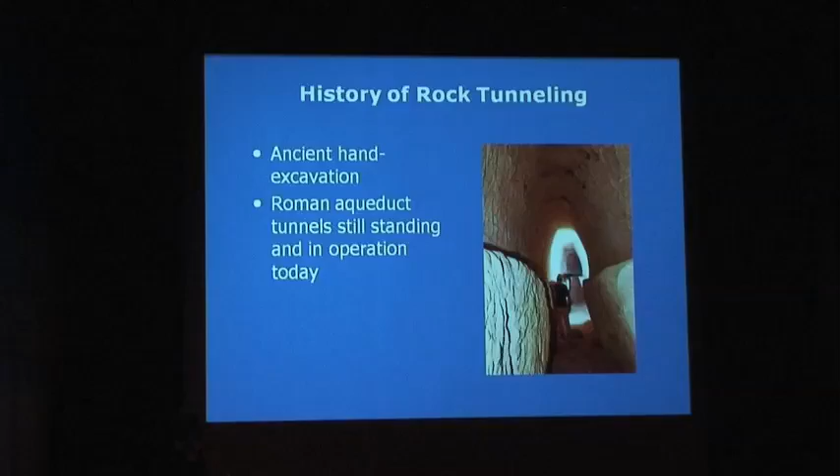So, we'll begin right at the beginning, and that is the use of the underground space for tunneling to provide water and other facilities to the ancient civilizations, the Romans, the Egyptians. And you can see from the shape of the tunnel here, which was built in those days, they relied upon the inherent strength of the rock itself, the shape of it to maintain its integrity. There's no support inside, it's hand excavated, and it still stands today, many of them still in operation.

The beauty of the tunnel boring machine is that tunnels are now excavated, built, and last for centuries in ground that would not allow such excavation, but for the fact that we have the facilities and the capabilities of modern tunneling techniques.

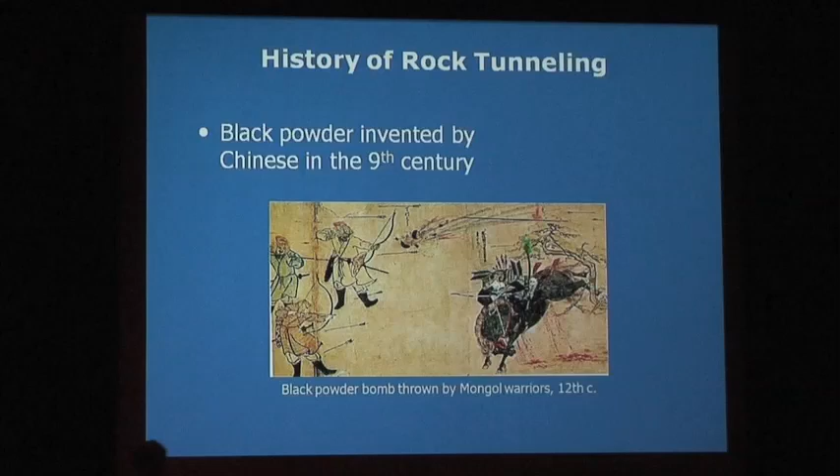The first attempt at excavating tunnels that were not hand dug was by the use of black powder, an invention that comes to us from the Chinese in the 9th century. Here you can see that the black powder was first invented for uses other than peaceful civil engineering. Black powder was then used in the early tunnel excavations.

The Hoosac Tunnel in the United States is one of the first long major tunnels that was built for a railway to go through the Hoosac Mountain, between 1852 and 1873. It took an awful long time to excavate the tunnel, not all necessarily because of the difficult geology that was experienced at the West Tunnel, but other things interfered, including lack of funds, which hasn't changed to this day either. Many tunnels are still interrupted, delayed due to lack of funding.

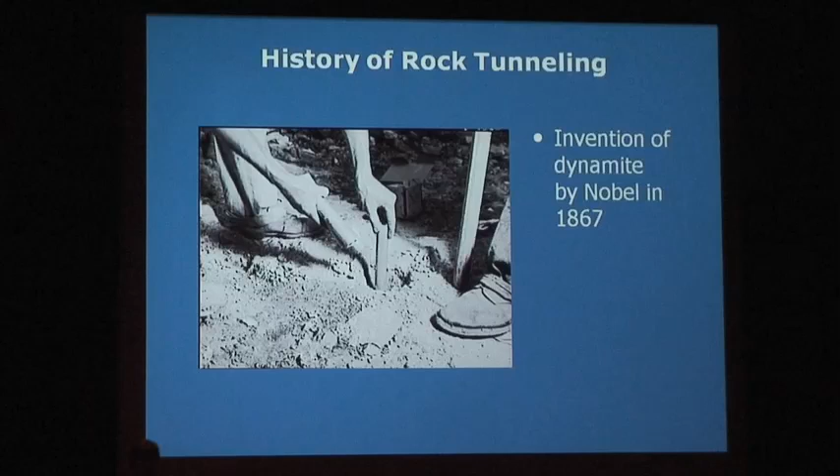The black powder was inserted into holes in the rock face that were drilled with initially handheld drill rods, with the second team member whacking the end of the rod with a sledgehammer and the partner holding the drill steel and turning it for every impact. Pretty dangerous situation. The invention of dynamite increased the safety to a degree. It is still a very hazardous method of tunneling. And so one of the motivations for the invention of the mechanized tunneling systems was to increase safety and eliminate the hazards involved. Drill and blast then became one of the principal methods of excavating the early tunnels through hard rock.

When it came to soft ground, there was no way really of separating the excavation from the support and the lining, which introduced the invention of Marc Brunel, who invented the tunneling shield. As you can see here, the shield was comprised of 12 sections in 3 levels, 12 across and 3 deep, with a man in every cell. So that's 36 men working at the face simultaneously. The boards here are supporting the soft ground ahead of them with these screw jacks. Take the screw jacks away, excavate a few inches, put the board back, and so work down this guy, this guy, this guy, and 12 across. Behind them, the teams were building the layers of bricks and pushing the shield with the screw jack forward for every advance. Very slow, very laborious, very labor intensive, quite dangerous.

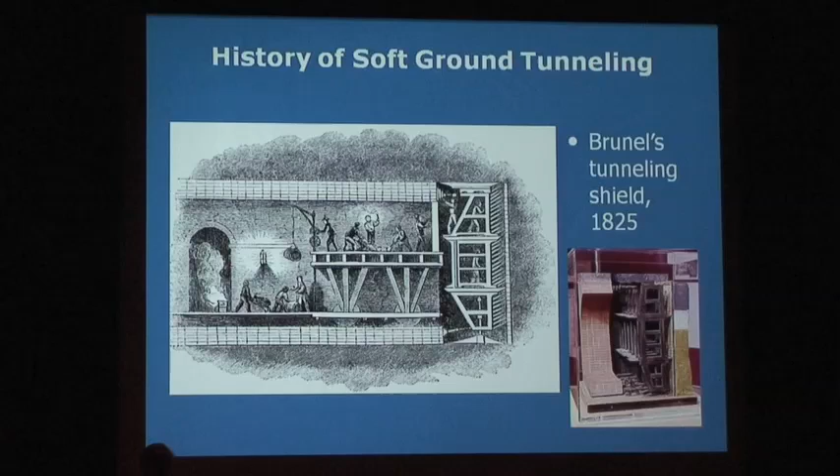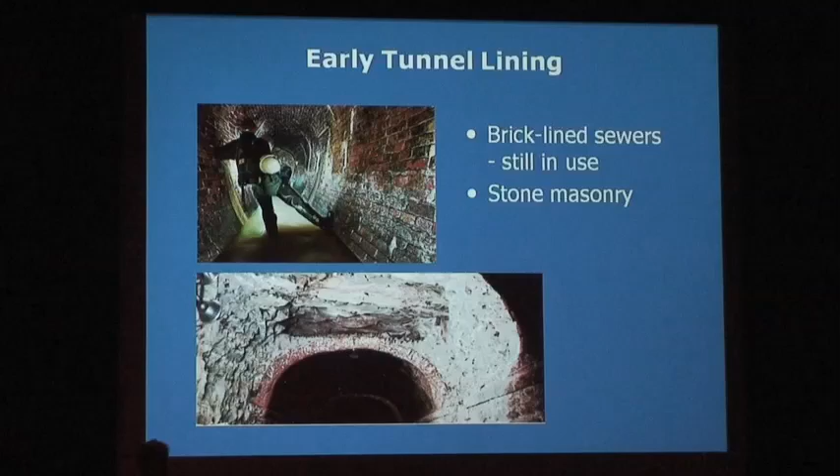Brunel's tunnel was a square or a rectangular shape. And the next major development was the introduction of the Greathead circular shields. Again, with hand excavation of the face, but here with cast iron segments now instead of bricks or masonry for the support. And into the 1950s, the use of precast concrete segments to support the opening. Still again with hand excavation and wood timbers to support a soft face.

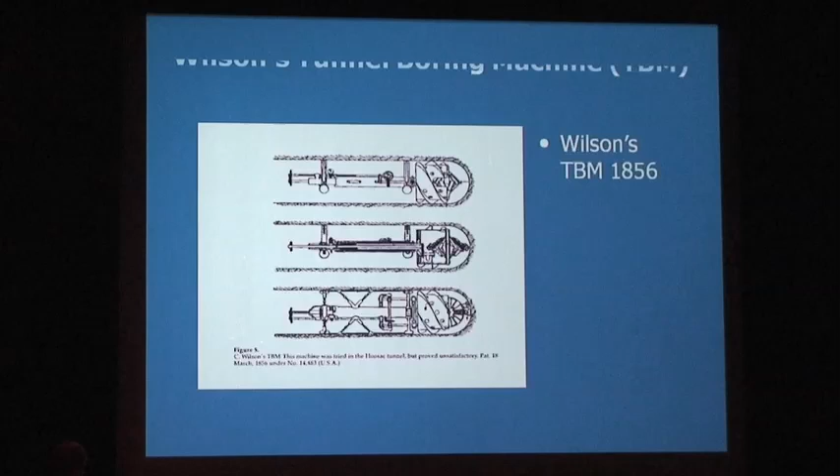We go then onto the early mechanical inventions. And some of these, you'll be surprised, were used very early on. This particular machine here was actually the beginning of the Hoosac Tunnel in the middle 1800s. The machine was cutting a 24-foot diameter tunnel face. The Hoosac Tunnel is about 25,000 feet long, about 4.5 miles, and it was expected that this machine would advance at about 12 feet a day. With a machine at both ends, it was anticipated that the entire tunnel would be excavated in just over 1,000 days. Unfortunately, that didn't quite happen like that. And it took more than 25 years, in fact, to finish the excavation of the tunnel.

This machine was built in Boston. It was taken to the east portal of the tunnel, and was launched in a test pilot site. It excavated 12 feet and seized up in a boring round and stayed there for many, many years before it was retrieved. The hole it dug was used subsequently during the advance of the tunnel as a workshop.

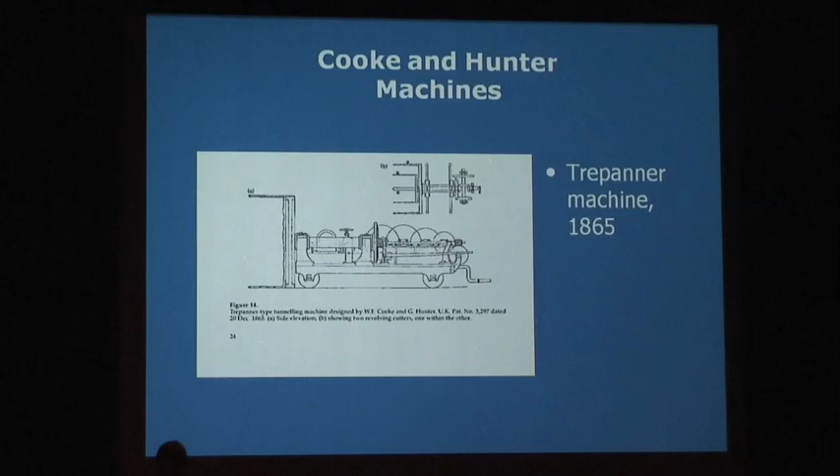Another idea from Cooke and Hunter was a rotating drum type machine, whereby the face is cut as the drum rotates this way, and the two side panels. So you can see you're building quite an odd-shaped tunnel, but the full face is being excavated as the machine moves forward.

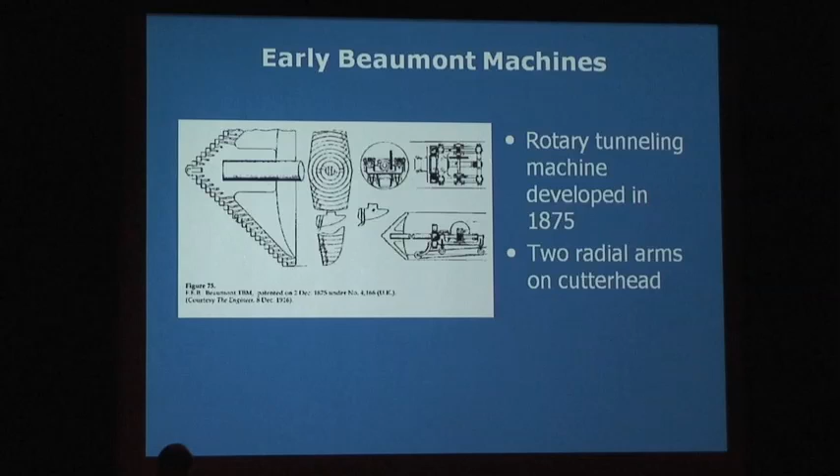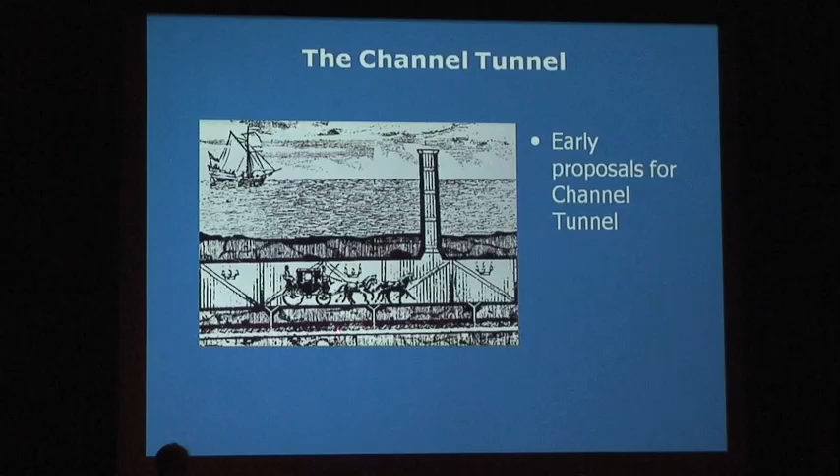Many of these very early tunneling machine ideas were invented to satisfy the fascination of many tunneling engineers with the prospect of a fixed link between England and France underneath the channel. So some of the very early ideas, as you can see, are pretty fanciful, but nevertheless, they were realistic. You needed to have the shafts to ventilate the 50-kilometer plus link, and underneath a drainage tunnel, just in case there might be a bit of water seeping through.

Beaumont's tunnel. This is also quite controversial. The industry does have its controversies every now and then, and this was controversial in the fact that Colonel Beaumont takes the credit for having excavated about 2 kilometers of an attempt at the Channel Tunnel in the 1880s. But a captain, Tom English, actually lays claim to that effort. This particular tunneling machine was powered by compressed air.

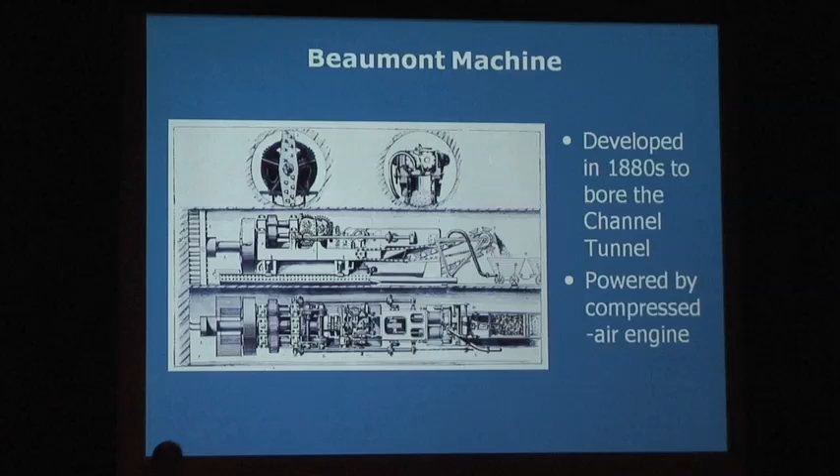The machine, as I say, did excavate 2 kilometers, but for political reasons, it was stopped. It completed its near 2-kilometer length and then was stopped due to the political pressures. And you can see here the log from that time, the advance rates, and you could say that the advance on average was just over 100 feet per week. 100 feet per week was pretty good for those days.

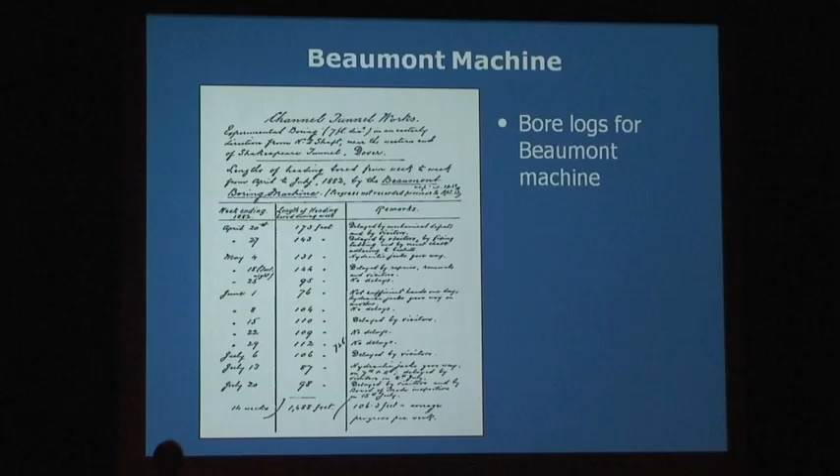And you can see also that one of the reasons for some of the interruptions was that visitors were coming down to take a look. That hasn't changed either. The fascination for visitors to go down into tunnels remains today. And as a visitor to many of the tunnels around the world, I can vouch for the fact that they get a little peeved if the routine gets interrupted because visitors need to be taken into the heading.

Beaumont's machine, even though it was stopped as an early attempt at the Channel Tunnel, did actually go on to be used very successfully in 1884 for one of the first fixed links underneath the Mersey River, between Liverpool and Birkenhead. They're wearing wet slickers, so you can see that it wasn't dry down there.

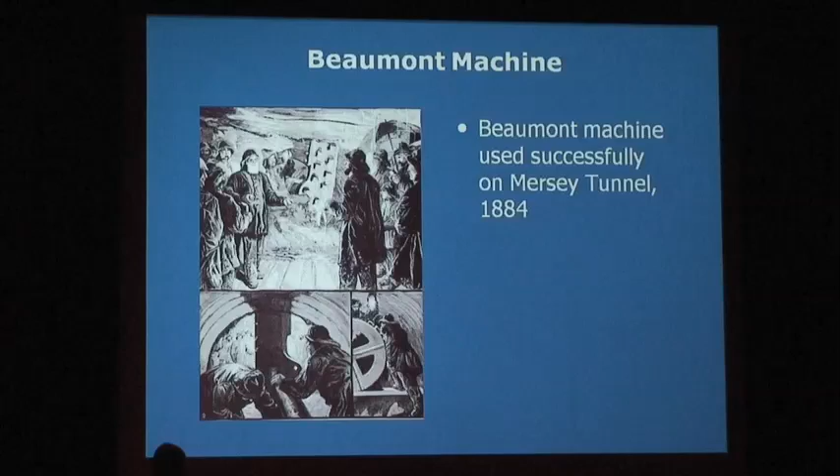And it was there that he invented this coal boring machine, but actually this was a carry-on from an earlier British twin-head coal machine, and all he did was make a new modern one with modern mechanical features, gearing, electric motors that were flame-proof, and hydraulics, and made the thing work.

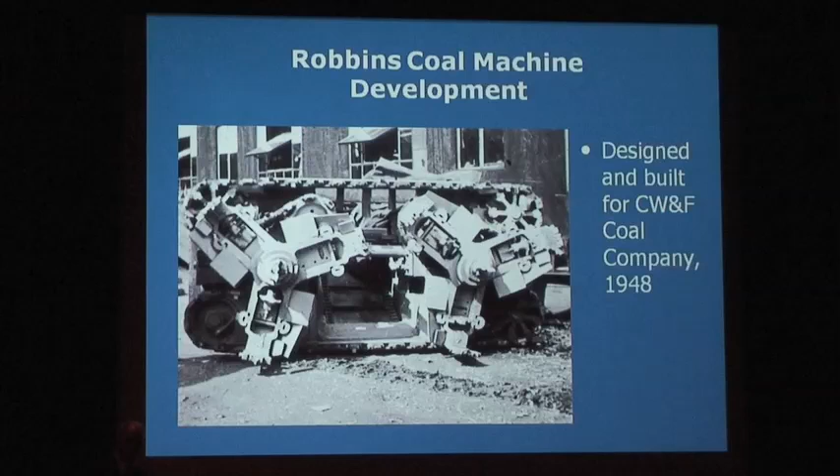Interesting point was that this machine had some disc cutters here on the rotating cutter head, and these arms had drag picks tipped with tungsten carbide. So the machine actually cut the tunnel face with the drag picks, and then the disc cutters rolled along in between and broke the coal. At that point, the railroads wanted chunks of coal. They didn't want fine coal, and so that was an attempt to keep the coal coarse.

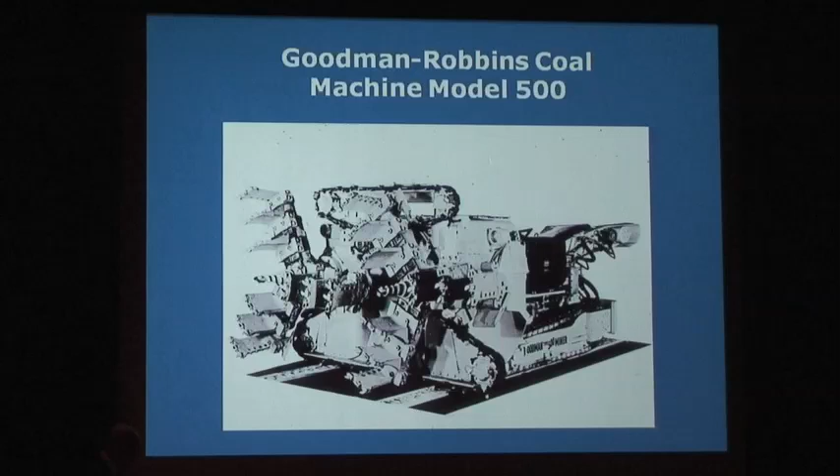Dad, in order to recover from his debts, sold his development to the Goodman Company, who made a whole series of these machines, which were later used not only for coal mining, but also for salt and potash mines. So what happened was that Goodman also made a big chainsaw, I think there were about 8-foot long bars that would cut coal. And they would cut the top and the bottom of the coal seam in order to break it out.

And a contractor on the Fort Randall tunnel, this is on the Missouri River, a major earth-filled dam. These tunnels had to be used for power and diversion tunnels. They had used a Goodman coal saw to cut the periphery of the tunnel, and then they drilled the center and blasted it.

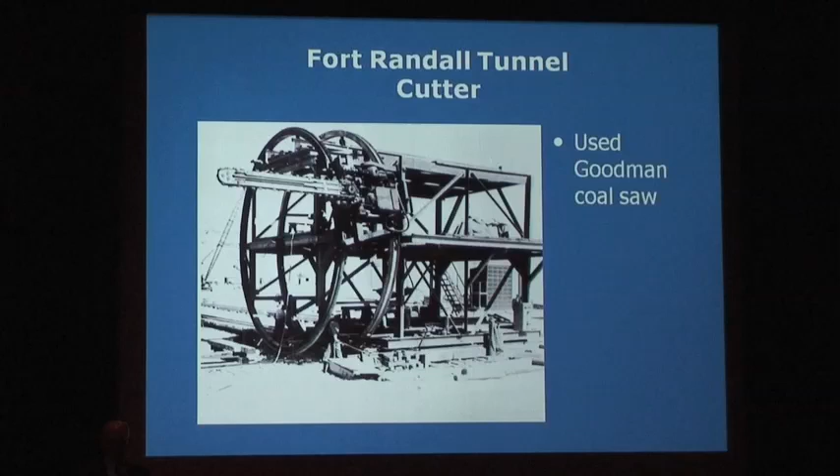And the advantage here was that they saved, I think it was about 3.5 or 4 feet of overbreak when you blast the whole tunnel. This very weak rock, a shale, would have to be filled with concrete, and they saved like 4 feet of thick concrete by cutting the outside. So this is a picture here of the coal saw periphery, and they blasted the center. And there's a machine mounted on what we called a jumbo.

So the next dam was the Oahe Dam in South Dakota, also on the Missouri River. Needed the same kind of tunnels. And the contractor, who was the low bidder, bid it with this device. And he came to Goodman and said, well, I want you to build me another one of those jumbos with a coal saw. And they said, well, we don't design that kind of equipment. Jim Robbins is a consultant to us now, and he'll be happy to design one for you and build it.

And Dad convinced this contractor, F.K. Mittry, to let him make a machine that would just cut the whole face, and you forget about the blasting. So he built this machine, built it in Chicago at the Chicago Bridge and Iron Company. The inner cutter head here turned in this direction, and the outer cutter head turned in that direction. Whoops.

I guess I hit the wrong button. There we go. Anyway,

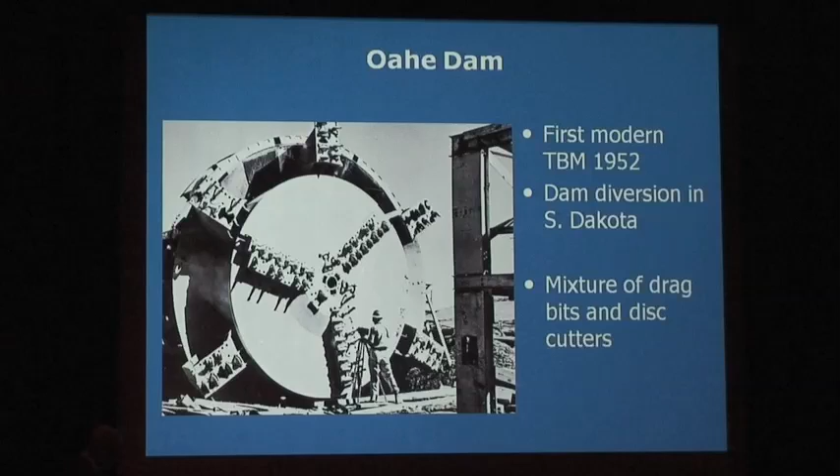that was an attempt to balance the torque required for these cutters to bore the face. As it turned out, the machine was so heavy, you really didn't need to react to torque that way, but it was very useful because the ground was very weak and a soft rock and fractured, and it would cave in. And so the central part of the cutter head was often held still while the outer part was used to pick up the cut rock and send it out on a conveyor.

This is the machine being withdrawn with the outer portion taken off, and you can see that the tunnel is lined with rebar and everything ready to pour concrete for the tunnel lining.

Then my dad, on his second, third, and fourth machines, decided he could cut harder and harder rock, and he built this machine for a job in Pittsburgh, a sewer tunnel that went under the, I'm not sure which river. I think it was the Ohio River.

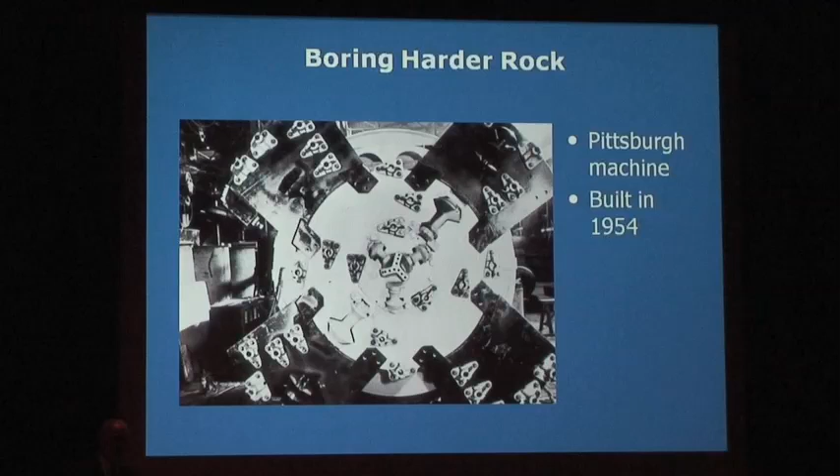Anyway, I worked on this job in my vacation periods from high school, and my job was to be at the conveyor at the back end of the machine and count the number of broken cutter bits as they came off the conveyor, so that when they got too many of them, we'd stop and change cutters.

This machine used, well, let me back up again. It used, I keep hitting the wrong button, disc cutters, double disc cutters, and drag picks. And these drag picks were like a machine tool with tungsten carbide on the tip. But the rock they were boring had layers of limestone and shale, and the shock was great enough so that it would just break the cutters.

This was a gripper shoe that fit on this position here. That's Jim Robbins standing in front of the machine as they were withdrawing it from the tunnel. I think in this particular case, forever.

Most of the contractors used these machines up to the point where the owner of the construction company would come in and take a look. One of them, a guy from Chicago where he built one of these machines, said to the foreman, our guy, how long would it take you to get that machine out of the tunnel? And he was told, well, we can do it in about 2 weeks, take it all apart. He says, you've got 2 days.

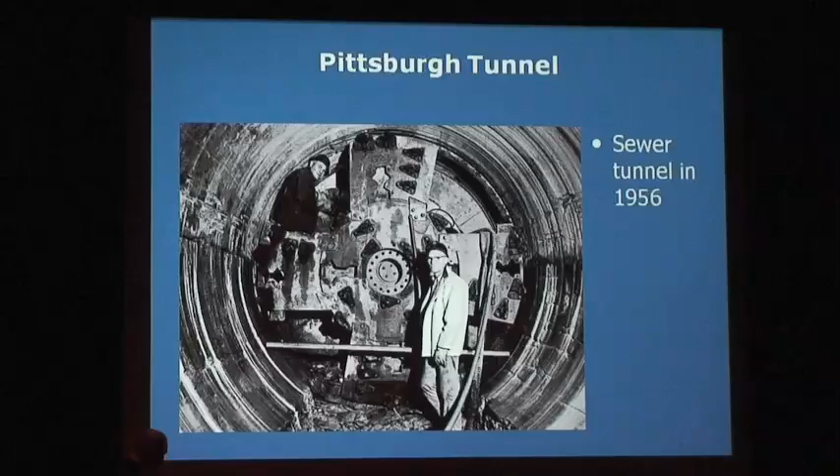So that's a picture of the tunnel face. Dad called his business James S. Robbins and Associates, which is a name we used until the mid-60s when I changed the name to the Robbins Company, and it wasn't a corporation at that point. You can see the drag pick grooves and the marks in between where the disc cutters broke the rock.

This was one of his patents and an invention that, when I did a lecture in Moscow, they presented me with a Russian textbook on tunneling, and it had Dad's patents in their book.

Then the most important breakthrough, and this is really what enabled hard rock tunneling. This is the Humber River Sewer Tunnel up near Toronto. In 1956, he realized that these drag picks weren't going to work in hard rock. And so he arranged the cutters in such a way he could use them and try to cut the rock with them, and then take them off and see if the disc cutters by themselves would cut the rock. And it did. They succeeded.

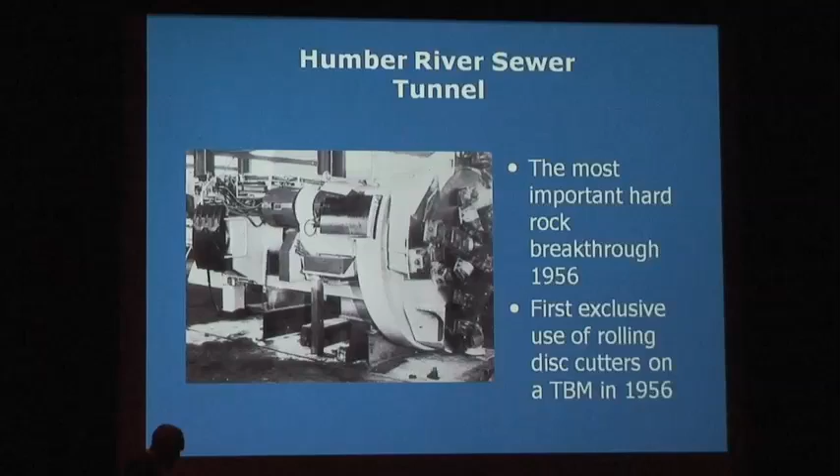This is a picture of the machine, you can see the gripper shoes here. The machine was skidded on this shoe to support the front end. It had side stabilizers to stabilize the machine, and a lot of the features that our current machines today have, although, oh, I hit the wrong button again. Let me go back. There.

This gripper was rigidly connected to the machine. So when you grip, you've got to go straight ahead, and that's all you can do. So if you want to turn the machine, you have to adjust the position of the machine, grip again, and then go forward.

So the next machine he built was this 29.5-foot diameter machine, also for the Oahe Dam. This was the third machine that was used there. This was in 1958, and this machine was about half built.

I had joined him, my dad, 3 months before, and he was killed in a plane crash at that point. So that was the end of the era of Jim Robbins. It's a real shame because we were really making progress while he was alive. He was a great inventor. But we finished the machine.

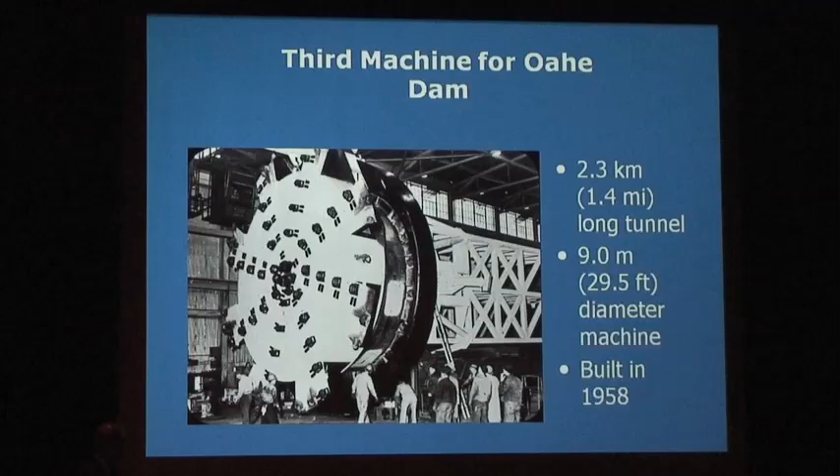This is the same thing, but one cutter head now instead of the double cutter heads. Shoving here with jacks pushing against the steel ribs in the tunnel, and the torque reaction supported by the mass of this jumbo.

So I'm going to move a little more quickly now. It turned out that was our 6th tunneling machine. We went for about a year and a half. We made the machine work, and then I gradually laid off all our workers, and it was just Dad's assistant, who happened to be the bookkeeper and office manager, and myself, the two of us, for quite a period of time until we got another job.

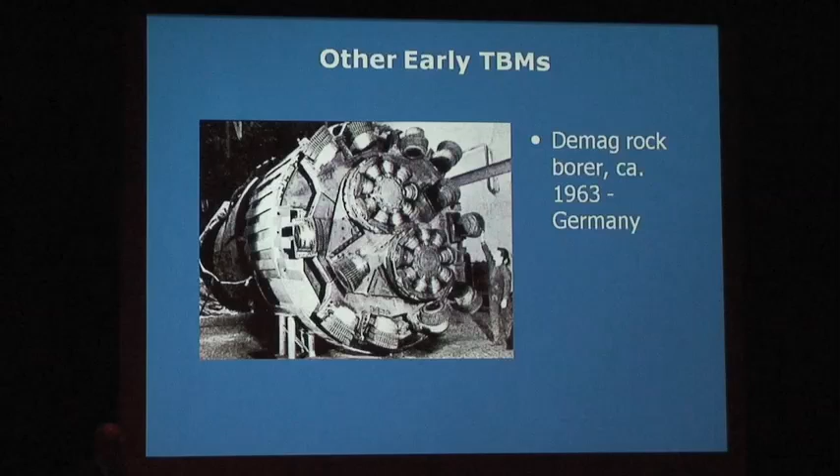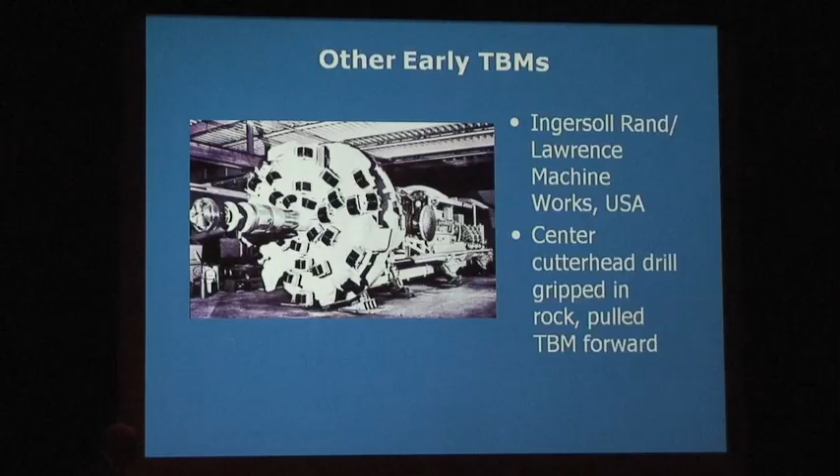This is another machine that used that type of cutters, the Lawrence Machine Works, which became part of Ingersoll Rand, used this machine with a tricone or 4-cone bit to make a probe hole, expand the bit in front, and then pull the machine forward. The problem was that if the ground was broken, it would just pull the face to you. And so it also had grippers at the back here to grip and shove the machine forward.

The Jarva company was our first major competitor in the United States. They were operating in the early 60s. It's a contractor that built machines for himself. This machine had, well, I keep hitting the wrong button, I'm sorry. These grippers were 2 sets of cruciform grippers, and the machine would go in straight lines. So if you wanted to steer the tunnel, you'd make a new adjustment to the angle of the machine.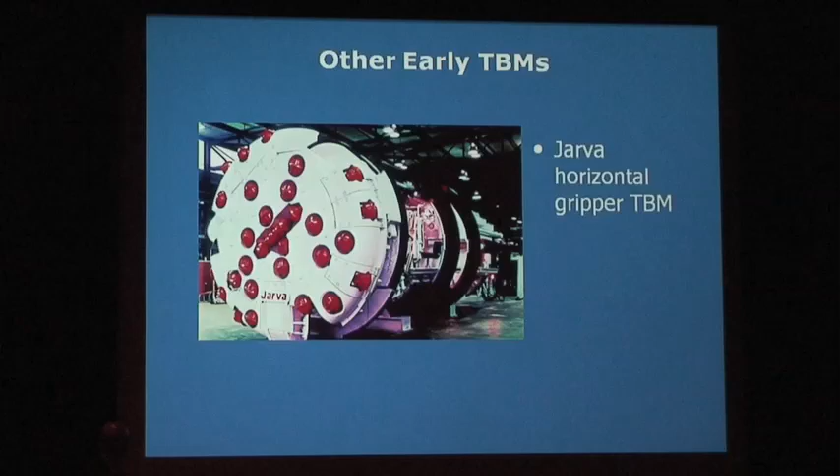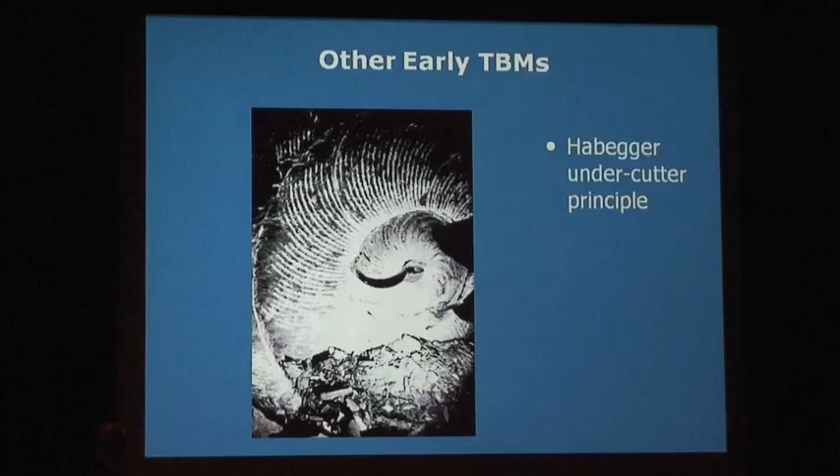This is a machine which was developed in Switzerland for undercutting the rock, with drag picks, with tungsten carbide. And they claimed that if they used these properly supported, it could cut very, very hard rock. So this is a picture showing how those drag picks would undercut the rock and break it back toward the machine. They did bore some very hard rock with this technique. So Atlas Copco acquired the Habegger development and made machines using a single full width cutter head that goes up and down, and this was called the mini full facer. Here's a machine breaking through a tunnel in a mine in Sweden.

So the next section of this talk is going to be Lacombe is going to speak on the different types of modern tunneling machines. What we call modern tunneling machines, we really break them into 3 categories. We've got rock machines that are just designed to bore rock, and that takes different types of machines. And there's lots of tunnels that part of the tunnel will be rock and part of the tunnel will be soil. You can imagine that as you drive, even in Philadelphia here, you see rock, you see soil, and they want a straight line tunnel, so a lot of the tunnels are mixed, part rock and part soil.

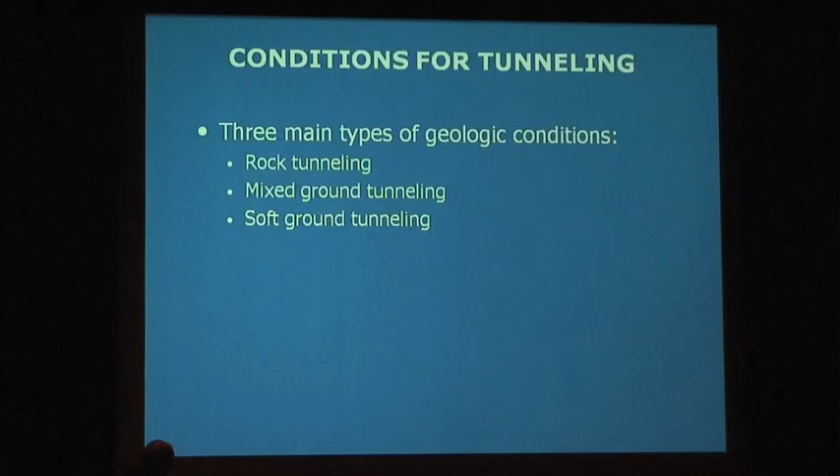And then of course there's tunnels that just are in soil and soft grounds, in the big deltas, in London, all London clay, no rock under London. A lot of tunnels are built in Shanghai now, a big delta city. There's no rock in these deltas, it's all soil under the water table. And so that requires a whole different type of machine. And I'll just go through the rock and mixed ground machines here, going the wrong way.

And we even take and break down these hard rock machines into special categories too. We have what we call an open machine. In that case, we're assuming that the rock itself is strong enough, like those bricks, to self-support itself, and that takes a special type of machine. And then we have shielded machines.

So we go to these open machines. The first one Dick proposed, those ones that we were looking at there, they were mostly open machines. We did see some shielded machines. And the first one that really worked to some degree was built in 1952. Then really the next invention was this pressurized bulkhead machine built in '62 that Dick designed for this very tough job in Paris.

And when we were coming in the car this morning, we were talking about this tunnel, and this tunnel was rather unique because it was under pressure. They were trying to hold the water table, but they ran into this coal seam, and because they had so much coal and pressure, the tunnel actually caught on fire. The coal caught on fire and was burning while they were trying to excavate this tunnel, and they had to flood the tunnel to put out the fire to start the machine again. And there's been lots of horror stories about tunneling, and I'd rather move on to better times.

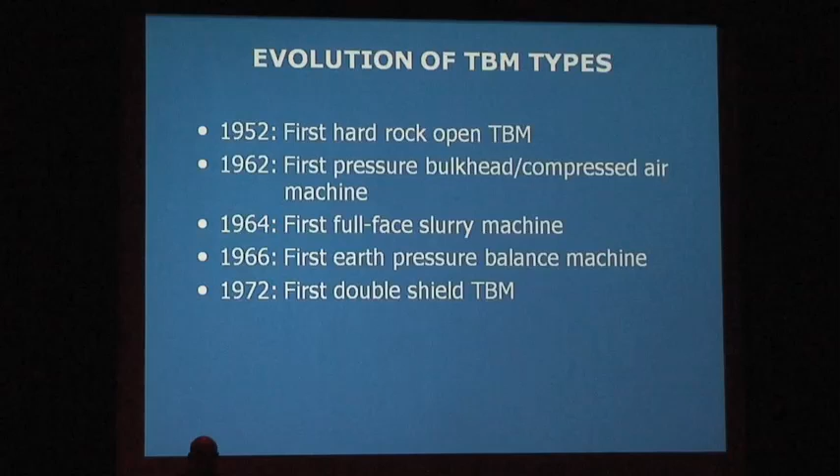Again, as you break these things down, they're used for the different rock types or different ground conditions. A lot of the tunneling now is kind of forced on us by the cities there. They need a subway, and hey, you can't select the geology, so you have to make the machine adapt to the type of soil it is. So we're a lot of times just boring under the city, and there's the big buildings above you, so you can't have any ground subsidence, so you got to hold the water pressure, you got to keep everything just in as-is condition, only put the tunnel in.

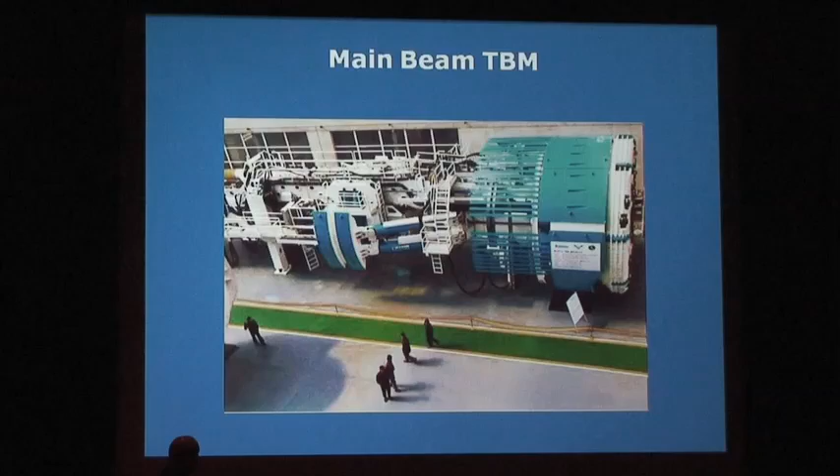So we look at this in a modern tunneling machine. This happens to be built by us and assembled in China. And rather than explain how these things work, this little clip will do it in a much better way.

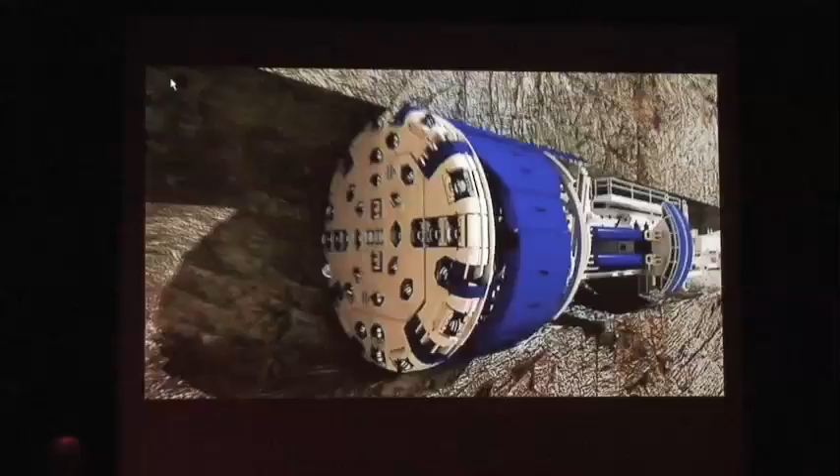Robbins TBMs range in diameter from 3 to over 14 meters. The front of the tunnel boring machine consists of a rotating cutter head in which disc cutters are mounted. The cutter head is supported by a main bearing. Robbins main bearings have the largest bearing to tunnel diameter ratio in the industry. This results in superior bearing life when cutting hard rock. The cutter head holds disc cutters, which consist of a shaft, bearings, seals, and a rolling hub. The disc cutters are not powered directly.

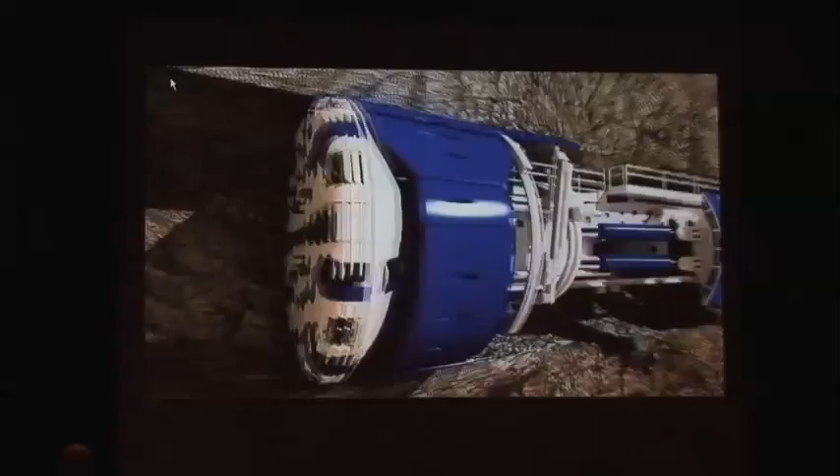As the cutter head turns, the disc cutters roll when they make contact with the rock face. The cutters roll in concentric circles. As the force on the cutter head increases, the rock beneath each cutter is crushed and fractured. Eventually, these fractures meet, and rock chips or muck break away from the tunnel face. This process is known as kerf cutting. Buckets in the rotating cutter head scoop up muck from the bottom of the tunnel. As the cutter head rotates, gravity pulls the muck from the buckets and deposits the excavated material onto a belt conveyor inside the main beam. The muck is then transferred to the rear of the machine for removal from the tunnel.

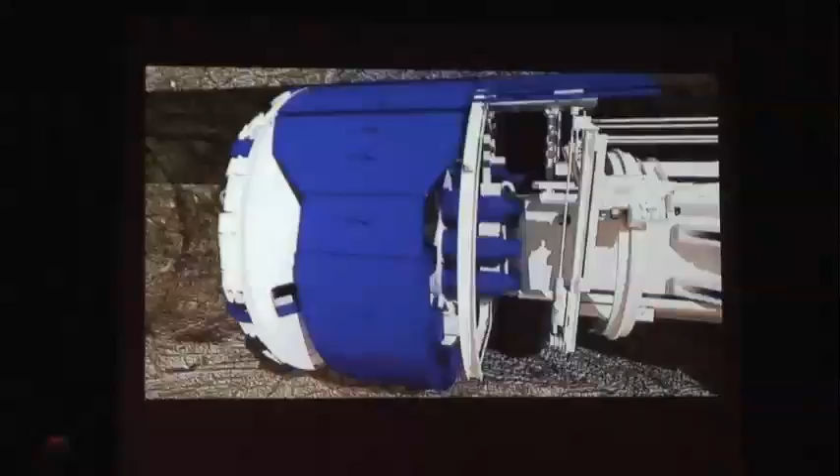Eventually, the disc cutters wear out. Cutters can be replaced from the front or the back of the cutter head. The Robbins TBM offers unique cutter head efficiency. Hard rock cutter heads can vibrate intensely during operation. The Robbins TBM provides hydraulic bracing which expands radially to significantly reduce vibration and disc cutter wear. In addition, Robbins hard rock cutter heads are significantly deeper than the industry standard, further enhancing the rigidity of the structure and rock cutting efficiency.

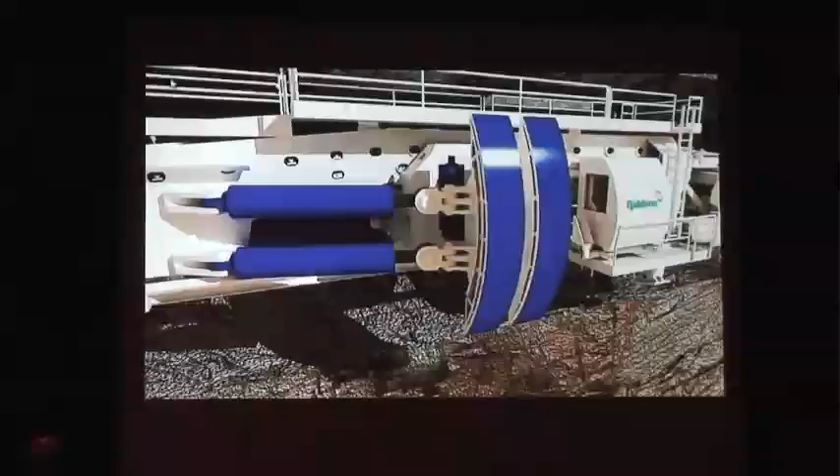The force which thrusts the cutter head into the rock face is provided by multiple propel cylinders which are mounted to gripper shoes. The gripper shoes are firmly anchored in place by gripper cylinders, which push the shoes outward against the tunnel wall with tremendous force. The gripper shoes provide the reaction base for the propel cylinders.

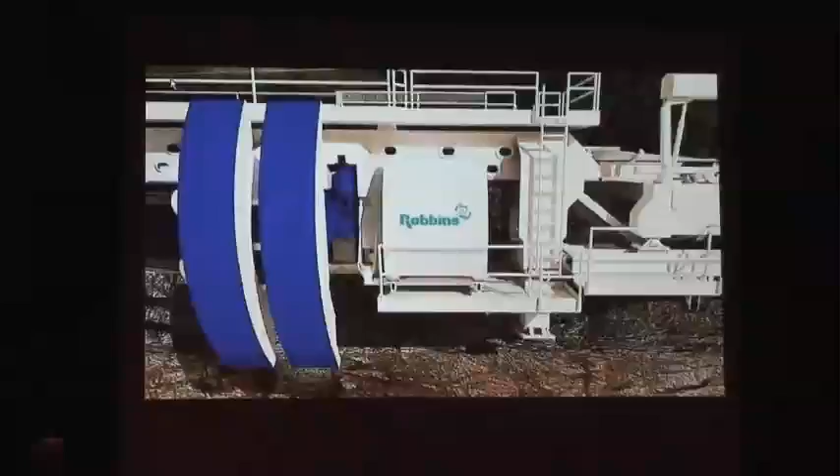A TBM boring stroke is completed when the propel cylinders are fully extended. At this point, the TBM must be re-gripped. To do so, the cutter heads must stop rotating. Then, rear legs are lowered to support the machine's weight so that the gripper shoes can be retracted from the tunnel wall and pulled inward. The propel cylinders are then retracted, which advances the gripper carriers and shoes. The gripper cylinders extend the shoes outward, once again anchoring them against the tunnel wall. Finally, the rear legs are retracted and boring can resume.

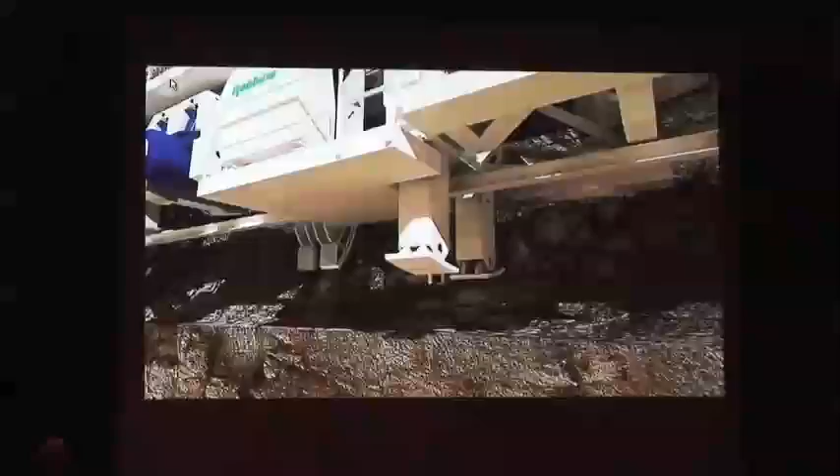The floating gripper system created by Robbins using a sliding trunnion mount allows the TBM to be continuously steered while boring. This superior system allows for precision steering adjustments and results in a more accurate alignment and a smoother tunnel face.

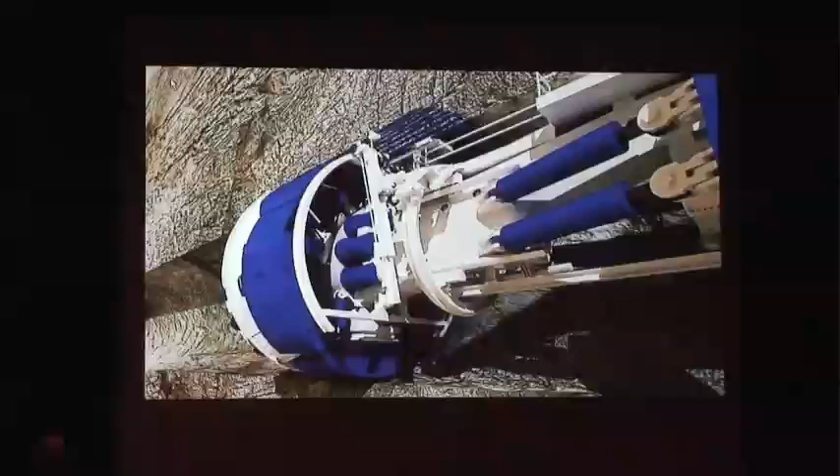Proper support of the rock as the TBM advances is critical to the safe construction of a tunnel heading. Robbins provides a variety of mechanized devices to assist in rapid, comprehensive ground support. Rock bolting is quickly and safely achieved by the use of Robbins custom-designed drill fixtures. Drilling takes place primarily under the protective canopy of the shield fingers, supported by previously installed bolts. A wire mesh erector provides for quick placement of large panels of welded wire fabric. A ring beam erector assembles, correctly positions, and expands a multi-piece ring beam, all within the protection of the shield finger.

In some cases, remotely controlled shotcrete robots are the best solution for ground support in fault zones or highly fractured rock. These robots facilitate the controlled and rapid application of shotcrete at a minimum of time and cost. Probe drilling can detect the ground conditions ahead of the TBM, such as fault zones or water. Probe drilling is typically performed at distances of 30 to 60 meters ahead of the machine. If weak ground is found, it can be pre-grouted to increase...

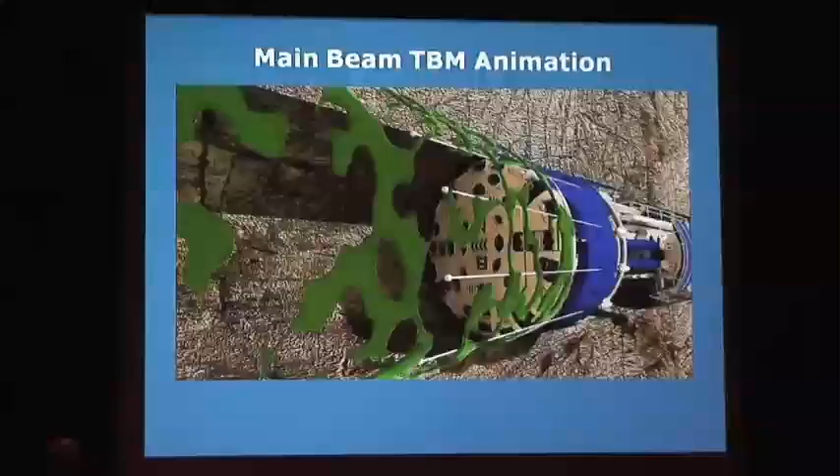That's it. So I think that explains how these machines work better than I could even come close to explaining it. And of course, it looks easy in the animation, but it's much more exciting to see them doing it underground, really physically doing it, and the rock pouring in on you, or the water pouring in on you, rock falling down, and these guys working there. It's always an exciting adventure to go underground.

Another invention that Dick did was make a combination of these hard rock machines. You can see the cutter head here is a big, tough cutter head, and the machine's completely shielded. And what they do here is they bore and set the lining simultaneously, and this animation will show it. This is only about 3 years old in a project we're doing down in India, boring a 42-kilometer tunnel, 10 meters in diameter, under a Tiger Park there. So there was no intermediate access, one machine on one end and one machine on the other end. And amazingly, the machine today goes as we predicted. That's a big step forward in our business.

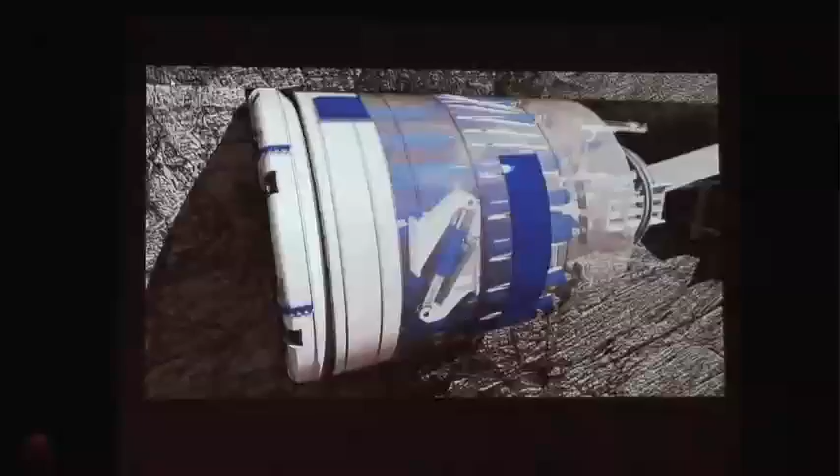Double shield TBMs consist of the rotating cutter head followed by an arrangement of shields, a forward shield, a gripper shield, and a tail shield. A smaller diameter telescopic shield attached to the rear shield slides within a larger diameter telescopic shield attached to the front shield. These shields offer protection from falling rock.

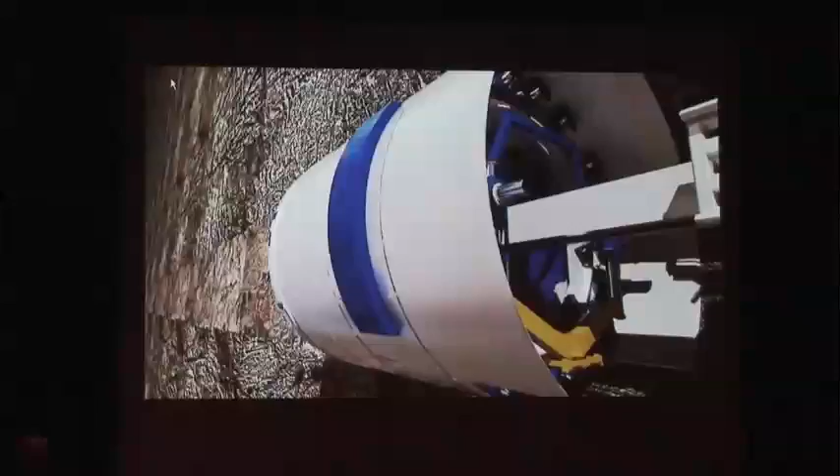In normal or double shield mode, gripper cylinders push the gripper shoes onto the tunnel wall to react to boring forces. The gripper shoes provide the reaction base for multiple propel cylinders, which then extend to push the cutter head support and cutter head forward. As the machine advances, the telescopic shield is exposed, providing protection from the surrounding tunnel environment. The gripper shield remains stationary during boring.

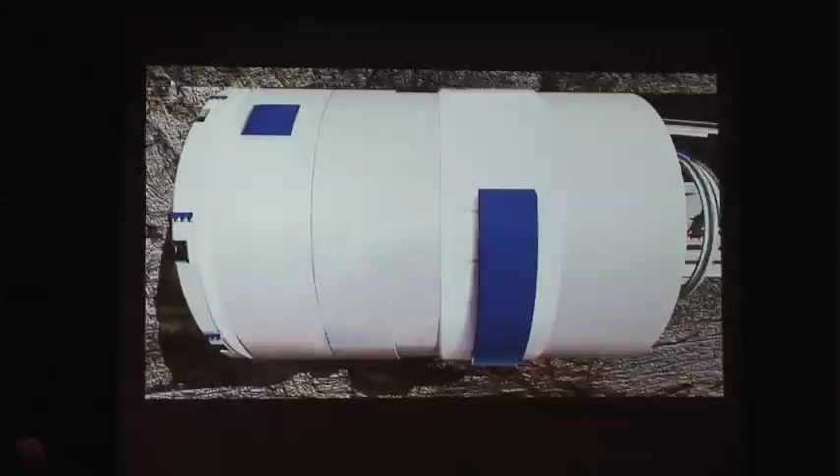A segment erector is fixed to the gripper shield, allowing precast concrete tunnel lining segments to be erected while the machine is boring. The segments are erected within the safety of the tail shield. It is the double shield's ability to erect the tunnel lining simultaneously with boring that allows it to achieve such high performance rates. The completely enclosed shielded design also provides a safe working environment.

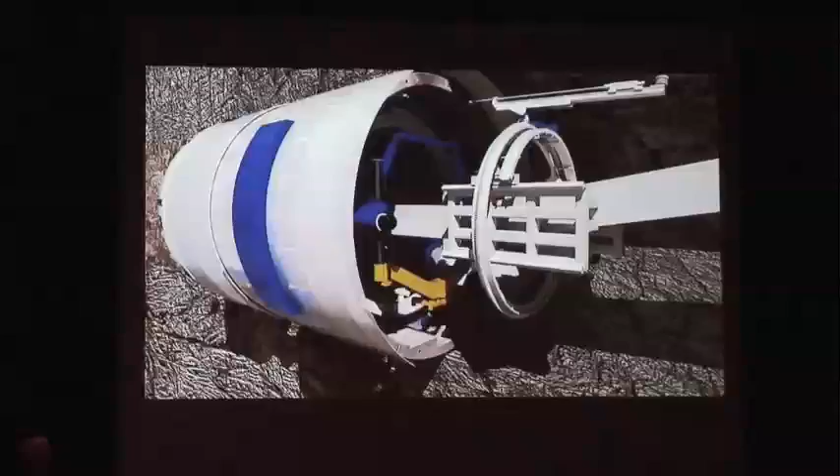If the ground becomes too weak to support the gripper shoe pressure, the machine thrust must be reacted another way. In this situation, the machine can be operated in single shield mode, the same method of operation as Robbins single shield TBMs use. Auxiliary thrust cylinders are located in the gripper shield.

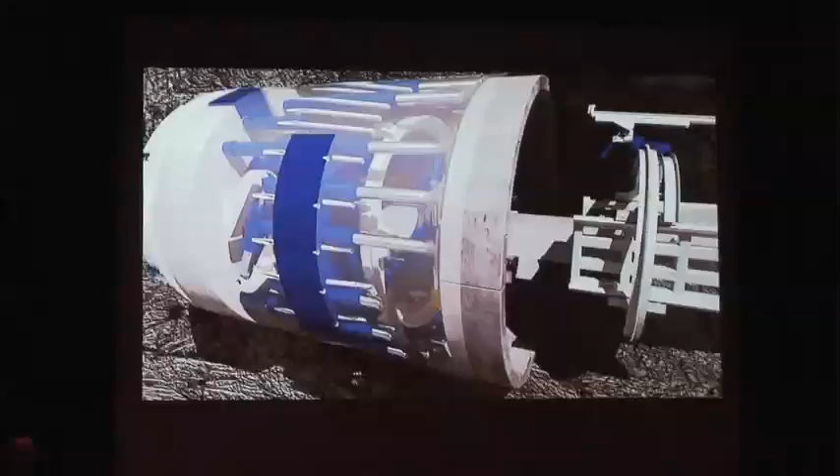In single shield mode, the thrust cylinders transfer the thrust from the gripper shield to the tunnel lining. Since the thrust is transferred to the tunnel lining, it is not possible to erect the lining simultaneously while boring. In the single shield mode, tunnel boring and tunnel lining erection are sequential operations.

Proper support of the rock as the TBM advances is critical to the safe construction of a tunnel heading. In addition to the tunnel lining, there are multiple options for additional ground support. Probe drilling can detect the ground conditions ahead of the TBM, such as fault zones or water. Probe drilling is typically performed at distances of 30 to 60 meters ahead of the machine. If weak ground is found, it can be pre-grouted to increase ground stability.

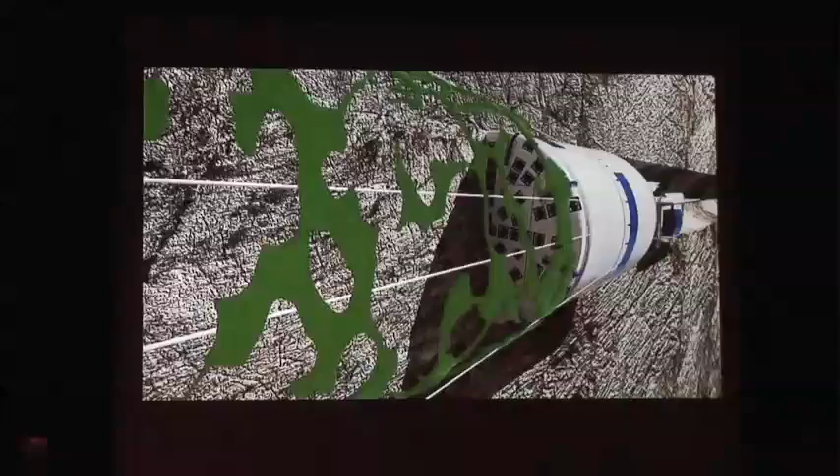And the key to this: in those earlier machines Dick was showing you, they showed you all kinds of big cutters and tungsten carbide cutters. When we tell people we cut this very hard granite or quartzites, they always ask, well, what type of material do you use to cut that rock with? And the answer is just simple chisel steel, the type that you would use to chisel with, but it's a little more exotic. The cutting is just this high exotic tool steel, special treated tool steel, and under high loads it just wears down.

This tip wears down, and when it wears down to this, we remove this whole section and put on a new disc. In hard rock, we usually use about 10 or 15 discs before we wear out this bearing assembly. And this has been the key in the success for tunnel boring. Even in very hard granites at about 15 feet diameter, the hardest granites you'll find, we can still get 4 or 5 feet an hour, and much higher rates in softer rocks.

And so this is the tool that really cuts the rock. Today we have them in sizes up to 20-inch in diameter, and the techniques of putting them on are very fast and very safe. And that's the key to it right there, the disc cutter. It's just an assembly.

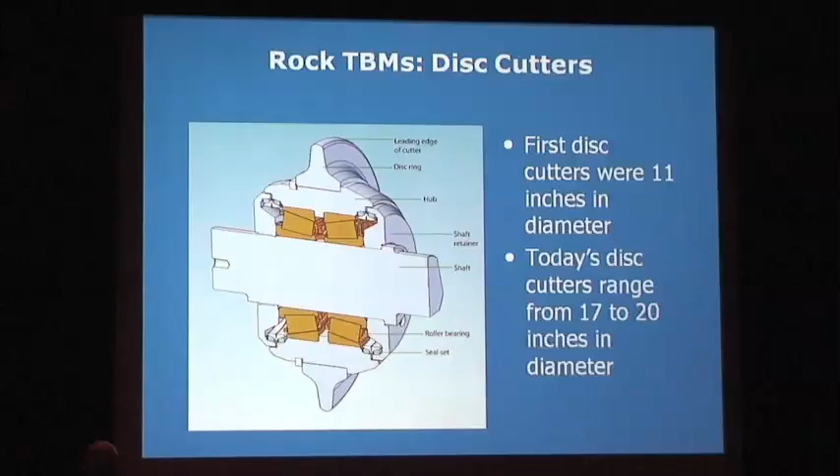And this is a close-up shot, actually done in the lab, of how this disc cutter works. You can see it cuts just this groove, and the chips start falling out, they just break out like that. That's a big chunk of granite being cut by a cutter in a lab. You can just see how the rock actually explodes, and that's what's going on all the time when we're cutting. It's really an exciting process.

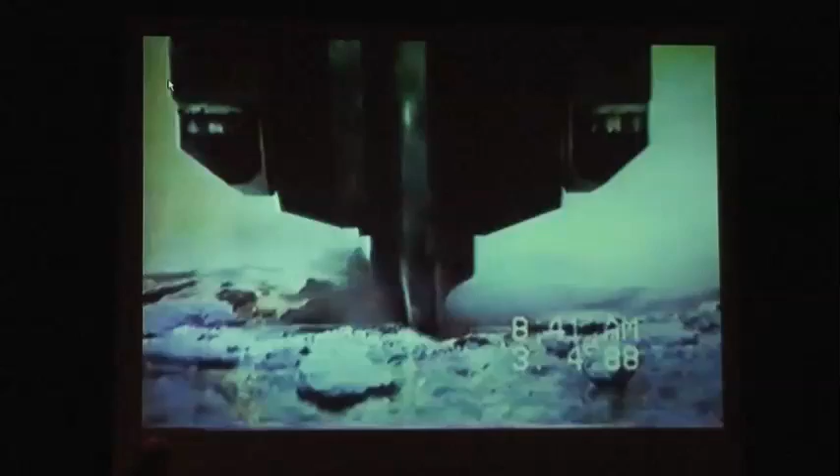And you can also see how this thing jumps around. The camera's not moving here. I guess it would be if you were in the cutting head, but this is actually in a lab. What's interesting is you see how that thing's jumping back and forth. And this cutting tool is very, very unstable. What we had to learn is how to make these machines unbelievably robust to withstand these forces. So the cutter heads that we have today are tremendously heavy pieces of material, just to react those forces that you see jumping up and down there.

So my little stint is over here. I'm going to ask my partner Joe to go on with the soft ground machines.

Soft ground machines are a bit different from the hard rock, and you were just witnessing the violent mechanisms involved with disc cutters and excavating rock. In soft ground, the problem is kind of the opposite. In hard rock, getting the rock to come down is the problem. In soft ground, it's getting it to stay up, to not over excavate.

In soft ground, the ground tends to flow right into the tunnel, and in urban areas it causes subsidence and can cause catastrophe, buildings falling, railroads sinking. So the key is trying to match the volume of material excavated with the advance rate of the machine, so you're excavating exactly the correct volume of material.

And this gets further complicated when you're working under the water table. Then you're trying to control the volume, and also the pressure in front of the machine, and we have two different solutions. One is with earth pressure balance machines, which have screw conveyors, and they excavate the material at a controlled volume. When there's sufficient fine material like clay, you can actually form a watertight plug within the screw conveyor, which keeps the water in front of the machine, and out of the back of the screw conveyor comes primarily solids.

When you get into porous ground and sands and gravels, you can no longer form this watertight plug within a screw conveyor, and the water would just pass right through these coarse materials into the tunnel. And there we use slurry machines. And so this bit of the talk is just covering those soft ground machine types.

There's two fundamental types: earth pressure balance, which were created by the Japanese, and slurry shields, which I think were more or less simultaneous German and Japanese inventions, and they've been modified substantially since those first machines. This is an example of an earth pressure balance machine, which is also expected to encounter some large boulders or harder rock, which is why this machine is actually fitted with typical hard rock disc cutters, as well as ripper teeth or other types of cutting devices.

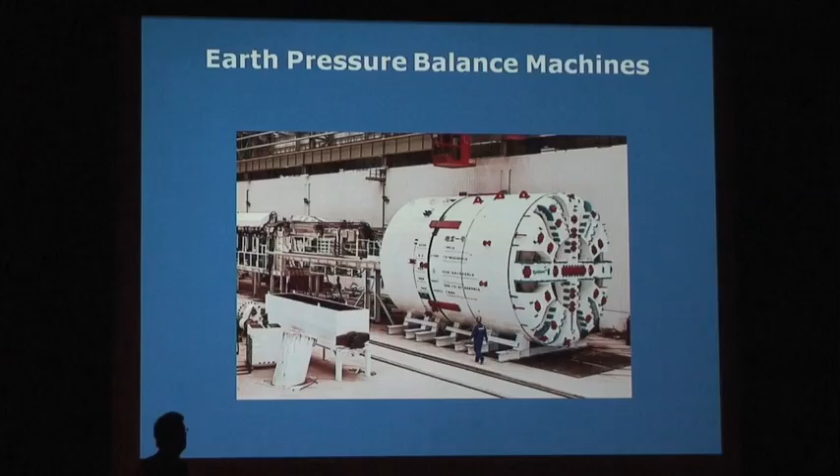Again, we have a video which will show it much better than I can. Robbins earth pressure balance machines range in diameter from 3 to over 14 meters. The front of the tunnel boring machine consists of a rotating cutter head in which cutting tools are mounted. The cutter head is supported by a Robbins main bearing, which has the largest bearing to tunnel diameter ratio in the industry, resulting in superior bearing life.

For soft ground excavation, the back-loading cutter head can hold a variety of carbide cutting tools. In mixed ground conditions containing sections of hard rock or boulders, the cutter head is fitted with a combination of carbide tools and single or double disc cutters. As the cutter head turns, the cutting tools make contact with the material to be excavated, known as the face.

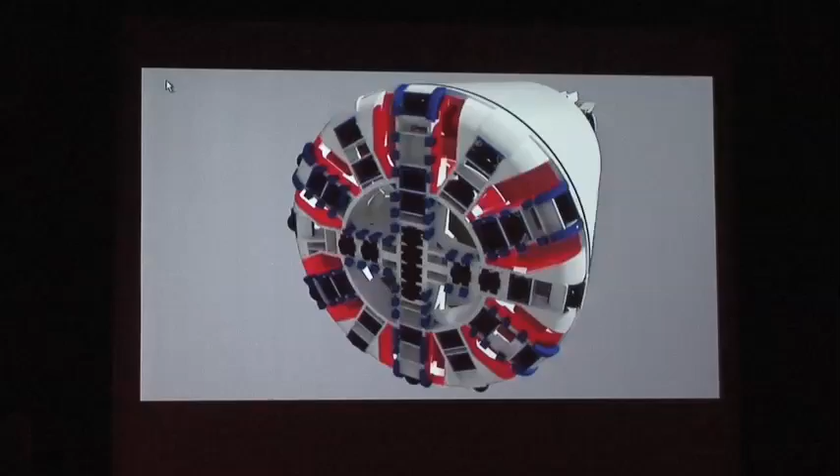A unique smooth flow spoke type cutter head design draws more muck from the face with a large opening ratio, resulting in decreased torque and thrust requirements and less abrasive wear on the cutter head structure. Depending on the ground conditions, additives can be injected into the face through multiple points on the cutter head. With additives, the face of the tunnel is more stable and is less likely to collapse during excavation. The additive may consist of foam, polymer, or bentonite.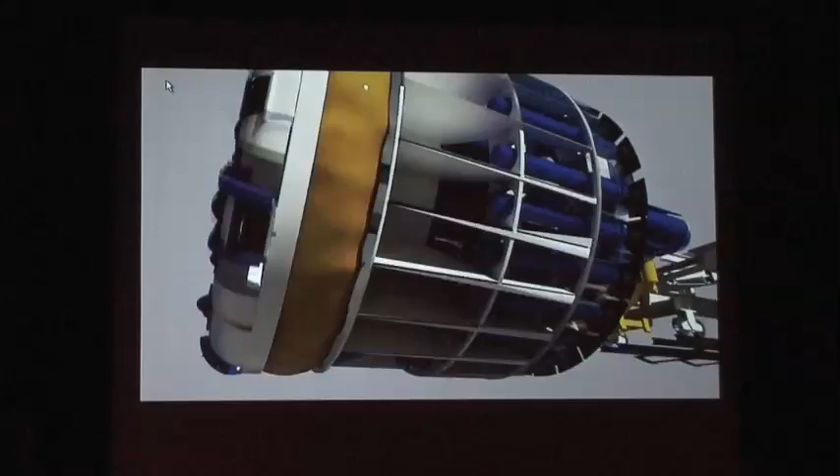During the excavation process, ground material or muck moves through the cutter head to a mixing chamber. Inside of the chamber, the muck is pressurized and holds the tunnel face. The pressure differential between the chamber and the screw conveyor then draws the muck into the screw conveyor. As this happens, the muck's pressure is reduced from ground pressure to atmospheric pressure. The depth of the tunnel, the ground material, and the water level above the tunnel determine the ground pressure.

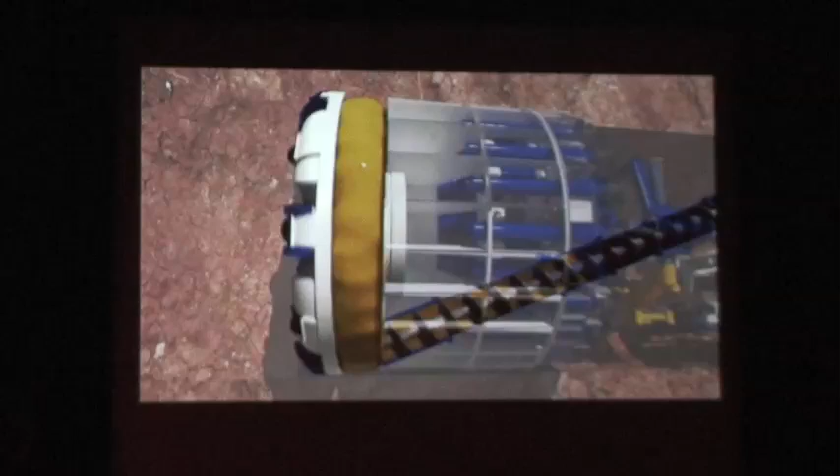In the case of lower ground pressure, only one screw conveyor may be needed. For projects with high ground pressure, Robbins installs 2 screw conveyors in order to bring down the pressure smoothly. After passing through the screw conveyors, the muck can be transferred to an open belt conveyor and then removed from the tunnel by muck cars or a conveyor system.

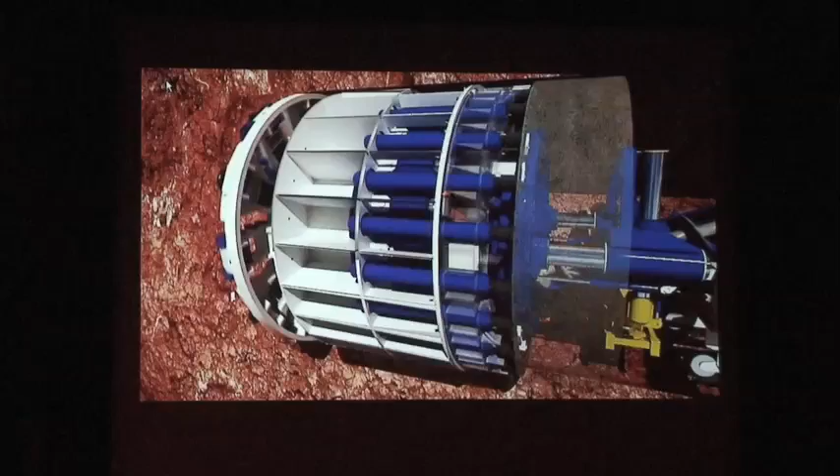The ability to balance the earth pressure is essential in order to safely and efficiently excavate the tunnel face. A TBM operator can control the pressure in the chamber continuously. To raise pressure, the operator can either increase the machine's rate of advance or decrease the rotation of the screw conveyor. To lower pressure, the operator does the opposite: either decrease the rate of advance or increase the rotation of the screw conveyor.

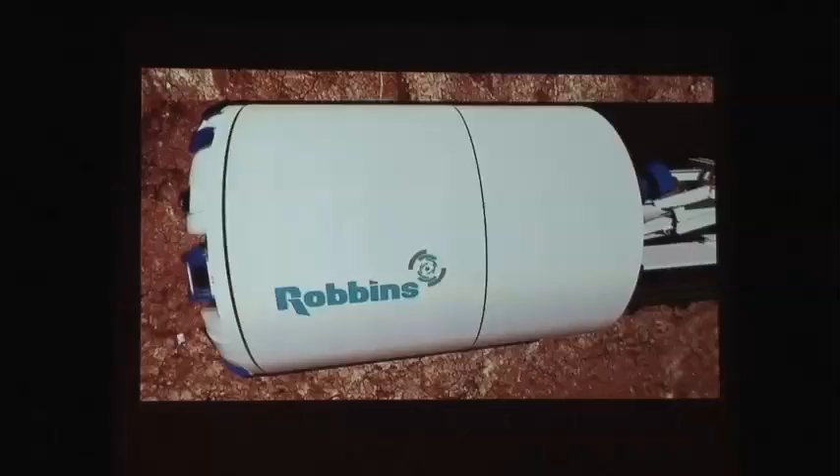The EPB cutter head is followed by a shield body. The shield body may be divided into a front and rear section for when the machine requires articulation during curved tunnel drives. During an EPB boring stroke, the cutter head turns and thrust cylinders extend to push the machine forward. These cylinders transfer the thrust to the cutter head by reacting against the tunnel lining.

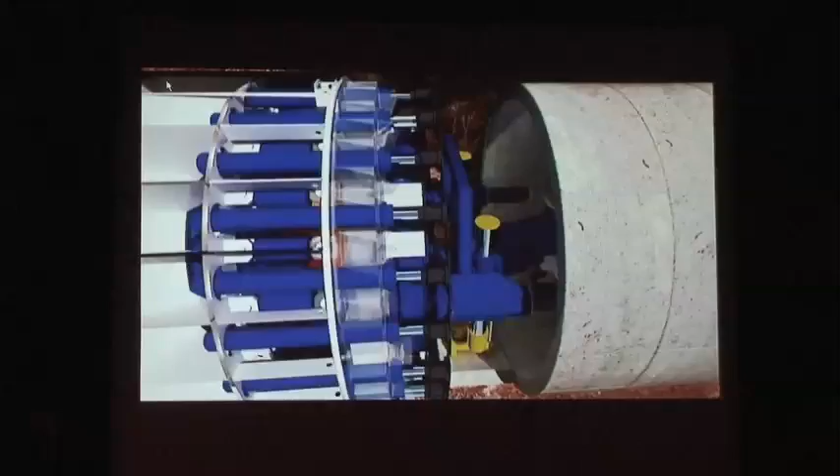After each TBM advance, the thrust cylinders retract. Then, another ring of segments is placed by a segment erector, and a new boring stroke begins. Since the cylinders react against the tunnel lining, it is not possible to erect the lining simultaneously while boring. Thus, tunnel boring and tunnel lining erection are sequential operations.

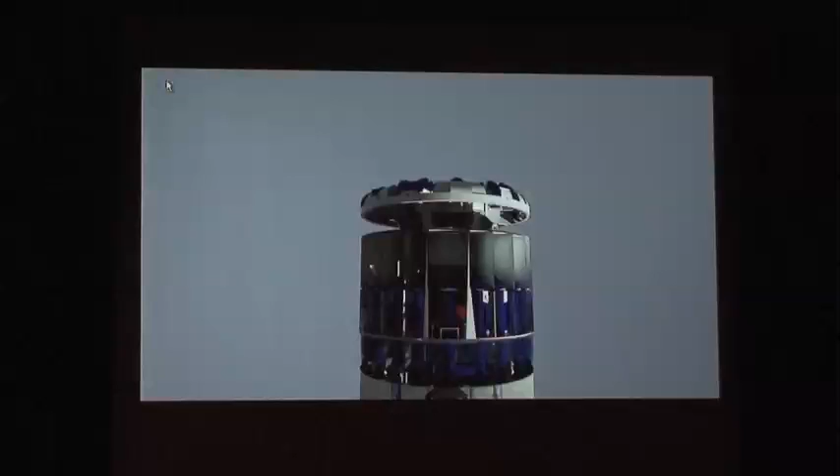Using a process called active articulation, Robbins EPBs can produce tight curves with a radius as small as 3 to 4 times the tunnel diameter. Active articulation allows the thrust to be transferred equally to the entire circumference of the segment ring, eliminating the problem of ring deformation. The articulation occurs between the front section and rear section, which are connected by articulation cylinders. Other EPBs use a process called passive articulation, which places uneven pressure on the rings while steering and causes deformation of segment rings.

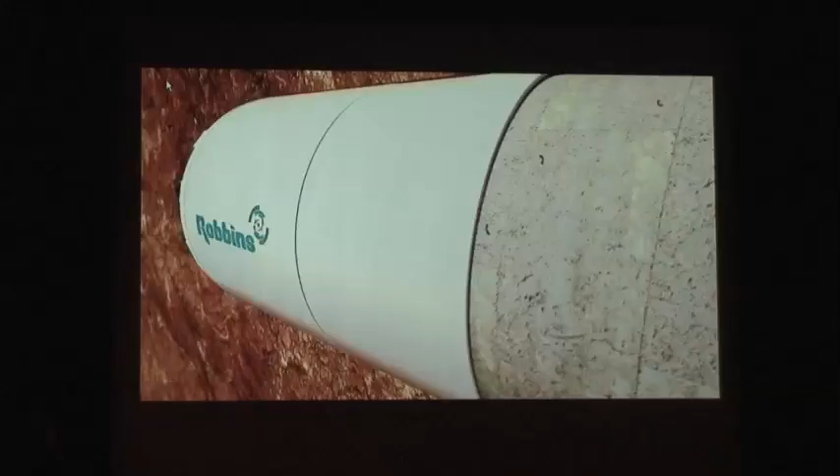Proper support of the tunnel walls as the TBM advances is critical to the safe construction of a tunnel heading. As the machine bores, temporary gaps form naturally between the soft ground and the tunnel lining. The boring process also creates a risk of settlement and upheaval at the surface. To stabilize the soil and fill gaps, the process of backfilling is used.

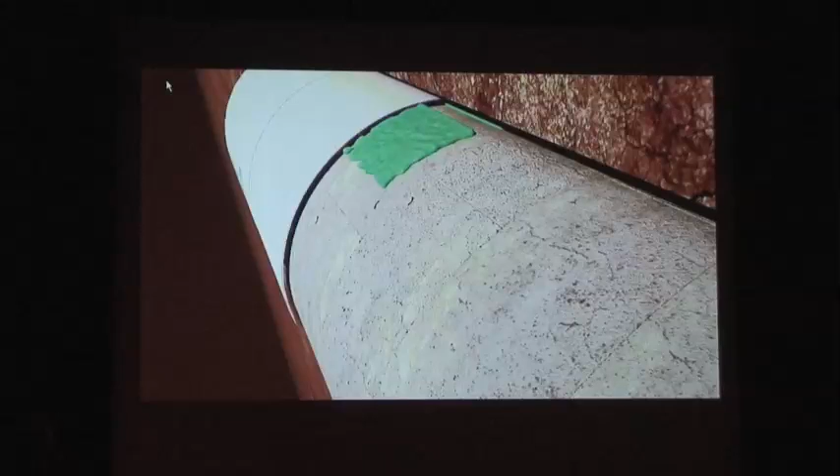Robbins' backfilling system utilizes 2 liquids rather than the industry standard 1 liquid to achieve more precise and effective backfilling. The liquids by themselves remain fairly viscous and are combined together in the tail shield where the hardening process begins. The liquid is injected from several points of the machine and flows around the tunnel walls, filling in any gaps and hardening rapidly. The entire process utilizes low-pressure pumps as opposed to concrete pumps, minimizing the risk of ground disturbances.

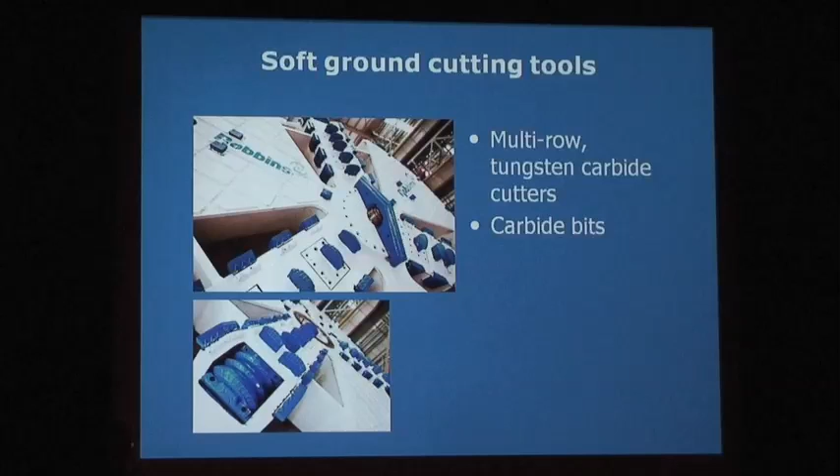So that's earth pressure balance machines. This is another earth pressure balance machine cutter head. This one is intended straight for soft ground. There's no rolling disc cutters on this. It tends to be used where you see primarily clay or possibly clay and sand material. There's a large center spade to keep the material moving out from the center. Otherwise, the slowest part of the head, it tends to collect there and cause high pressures and a lot of wear on the cutter head itself.

And again, this is an earth pressure balance machine cutter head, which is also expected to cut mixed ground, including boulders or some hard rock sections. This one, in fact, is working now in Guangzhou, China, 2 machines of this type for a metro system there.

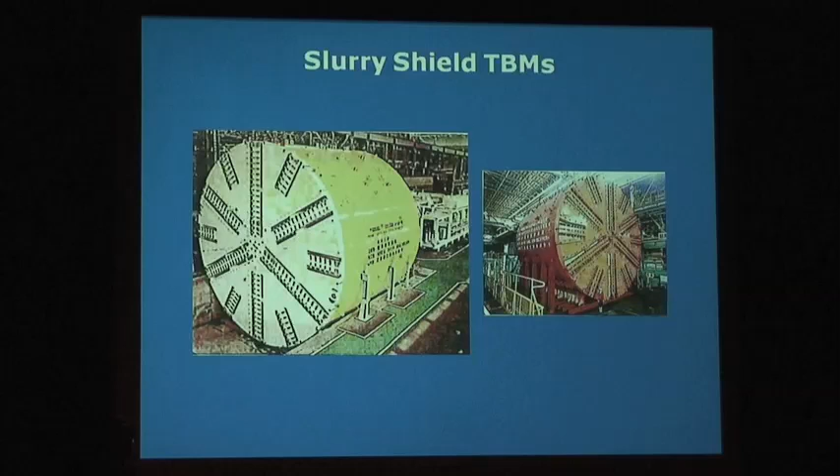Then we'll move on to slurry shields. Slurry shields use only water or water with bentonite and other additives to carry the soil out and to also maintain the pressure on the face. These are 2 large diameter slurry shields manufactured by Mitsubishi, a company with which we have a close relationship. The typical slurry shield is a simple shield, much like an EPB, cutter head, single shield, and a segment erector with a concrete lining and a backfill injection system for filling behind the segments.

The fluids are injected into the front of the machine, and the entire area from the pressure bulkhead behind the cutter head to the face is all kept pressurized with this liquid. Typically the slurry coming out of the machine is carrying about 10% solids by volume. Those solids are then separated from the water up on the surface using various methods. I won't go into the detail of that. It takes quite a lot of equipment of different type to separate that material, and then returns back the water to the machine.

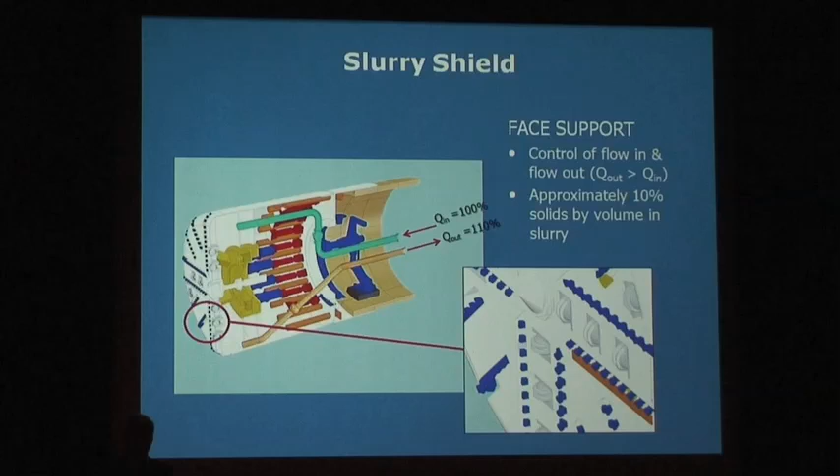There are different designs which use simply fluids to maintain the pressure there. There are also some designs which use an air bubble as a sort of accumulator to maintain the pressure on the face of the machine. When you're cutting very fine materials, clays and so forth, it takes quite a lot of technology to separate material from the liquids at the surface, and you have to remove nearly all of it, or an accumulation starts, and you can quickly get to the 10% level of solids in just fine material, and the machines will essentially stop excavating.

So these machines work in permeable ground underwater, under the water table, where no other type of machine can work. With the proper design, the fluid pressure can be precisely controlled to prevent settlement. The disadvantages are that the separation costs can be quite expensive, and some of the materials that help you to separate are not so environmentally friendly. If you get extremely permeable and drier ground, you can lose slurry and lose the ability to excavate. Blowouts to the surface, if the pressures aren't controlled precisely, can be a problem. This has happened on a couple of jobs when they were operating close to the bottom of, say, rivers.

And access to the face of the tunnel boring machine for maintenance is a major problem. Of course, when you're working in certain conditions, you can't evacuate the face. In other conditions, you can inject polymers or bentonite into the face and form what they call a filter cake, and then remove the water and keep air pressure. Then you can send workers in under air pressure to maintain the machines. But in certain geological types, it's impossible to form that filter cake, and therefore to evacuate the chamber, and it becomes essentially impossible then to do maintenance on the machines.